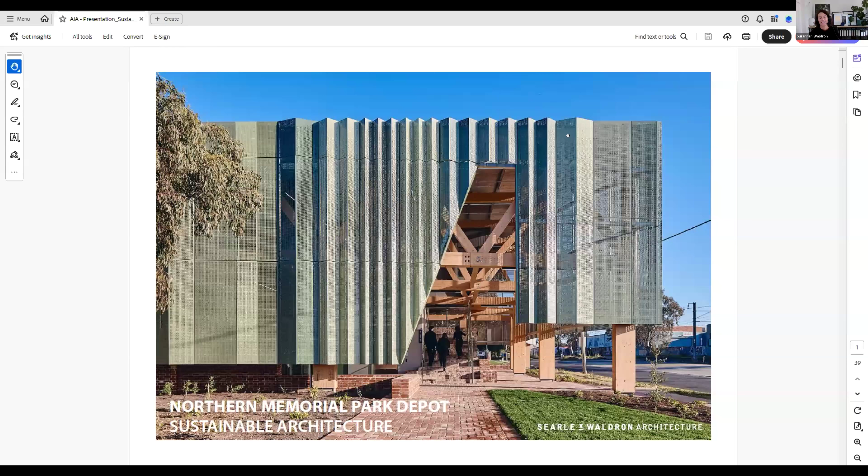Thanks, Steph. I'll just get my share sorted here. I hope everybody can see that one. And thanks for the kind words and introductions on this project.

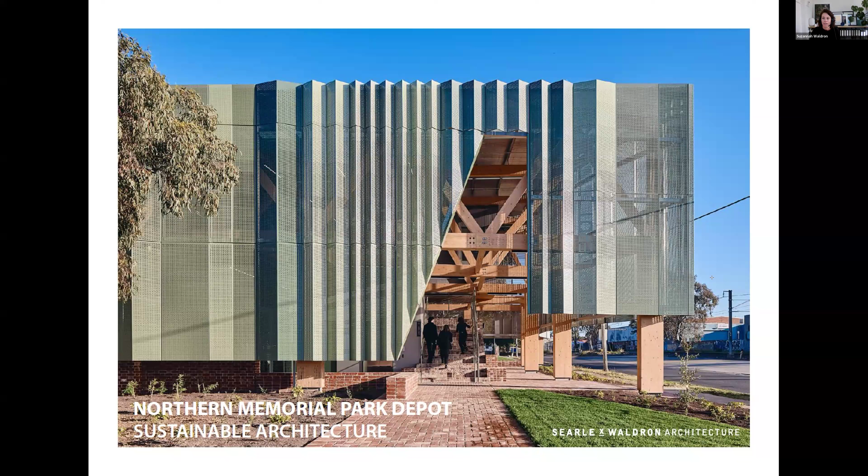Okay. I'm going to present the slides that we showed in the sustainability category at the Vic presentations for the Institute Awards this year, and I'll just do a few interjections as I go as well, just to explain some of our thinking around how we structured the presentation. Entering the sustainability category was actually quite interesting for our practice. Although we'd met the benchmark before, we hadn't entered a project specifically in this category. And it was a really nice opportunity to reflect on what we had achieved and try to quantify that in some way as well.

So Northern Memorial Park Depot is a significant project for Metropolitan Cemeteries Trust. It was built by Building Engineering. It's a contemporary facility which challenges the conventional typology of an operations depot by providing a beautiful workplace for people who work in emotionally challenging roles, dealing daily with grief and loss. Sustainability was a design priority for the project from the outset, and design infrastructure for longevity and sustainability.

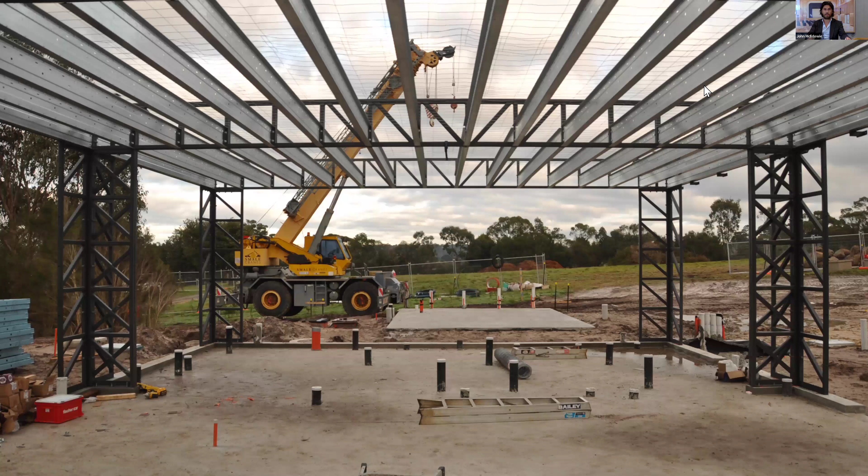So I want to start just by talking a little bit about the construction system, because that's kind of the heart of how this building is trying to innovate. It is, in the first instance, a prefabricated steel post and truss frame. Steel, interestingly, was chosen for its efficiency, but also because forest-grown timber can create monocultures and has potentially poor ecological outcomes. The concrete slab that sits below it is on a sort of plastic Cupolex waffle dome system, and importantly, that allows the separation at the end of its life, which isn't possible with styrofoam insulation that you traditionally have under a slab.

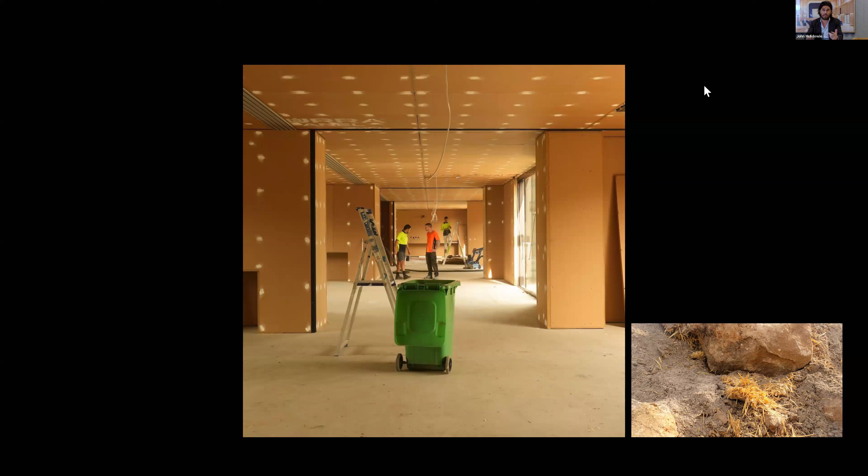The walls, ceiling, and the roof are all made from compressed straw panels, and they're embedded with biochar to clean the air the students breathe. And these panels sequester approximately 100,000 kilos of carbon dioxide. And they're also completely compostable, so any waste generated from on site is just returned back to the farm. The facade is made of recycled cork sprayed over an FC sheet substrate, which reuses waste from the wine industry.

And solar panels act as shading devices, as well as a pergola for outdoor learning, and provide 136% of the energy demand for the building, making it net zero in operation. It's also completely net zero in design, construction, and at end of life. I'll come back to that as part of our lessons learned. The battery storage system tied to the solar panels is Australian made and completely recyclable, with energy monitoring in each classroom, so the students can kind of gamify their use of the building and create opportunities for live behaviour adjustments to enhance the efficiency.

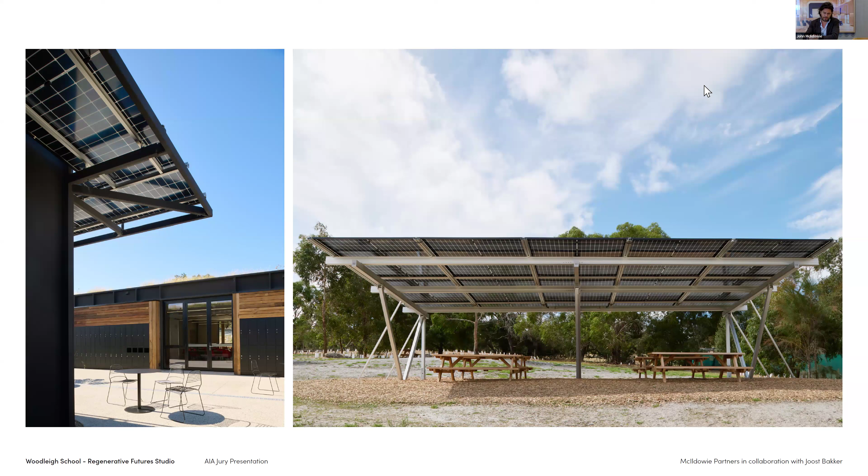The timber pergola that sits on the north side of the building to connect indoor and outdoor spaces is recycled from St Kilda Pier, and all other timber on the project is locally sourced from agroforestry. The living green roof creates a protected habitat zone that can't be accessed by invasive species like rabbits who have damaged the nearby nature reserve. It's designed in collaboration with landscape architect Sam Cox. It includes specific Indigenous flowering shrubs and grasses that act as a habitat for endangered native butterflies, bees and birds that cannot be grown on the ground. This means the building is a practical extension of the wildlife reserve and provides something that the wildlife reserve cannot.

And it also, I'll come back to this, but it provides really amazing learning opportunities for students to engage with the butterflies that are spawning on the roof, so that students are able to tap into and map the ecological benefits of the building. The roof holds 50 mm of water at all times and uses a drought-resilient wicking bed system to ensure the plants are well maintained, and they're still in good nick now after a summer or two. The green roof itself weighs down the building significantly and massively reduces the need for concrete footings. And it makes the green roof effectively cost neutral, which was a key driver in the decision making on the journey with the client. And based on some initial testing that Joost ran with the CSIRO, there's a view that the roof may be providing an insulative value of up to R17. So the reliance on air conditioning inside, and again being tested in practice, is extremely limited.

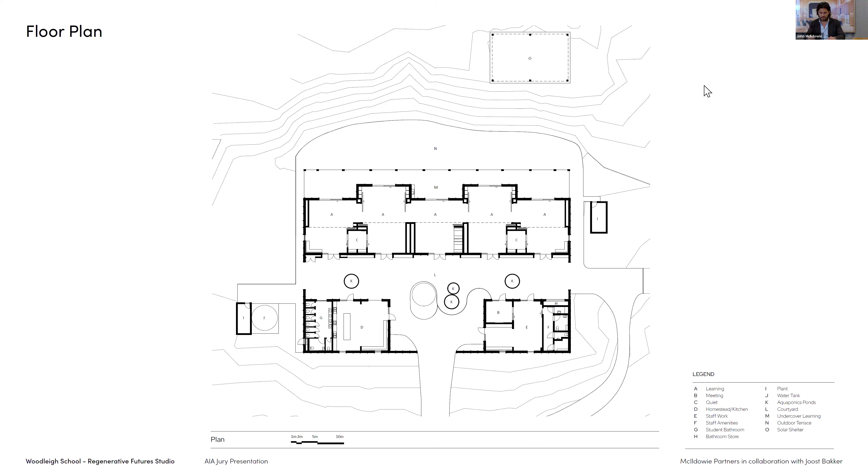This is a plan here. You can see the building is a collection of modular pavilions linked by courtyards and sheltered outdoor living spaces. The courtyard plan allows all the rooms to have a northern orientation, with solar panel eaves shading the north and west glazing, and all rooms also able to have cross ventilation.

Aquaponics tanks hold native fish, yabbies and freshwater mussels in the courtyards, filling those spaces with the sound of running water, providing learning opportunities on ecology and biology for students, as well as a food source, like literally catching a fish for lunch at school.

Each pavilion houses a separate function and aspect of the brief. The largest houses a collection of 5 learning spaces that you're seeing here. They're arranged linearly, with 2 quiet meeting pods adjoining them, and a series of flexible learning settings for personalisation and student agency.

The learning spaces are fitted with recycled fabric ceiling panels, as well as large sliding doors that link the spaces that allow traditional subject-based learning to occur side by side with the school's project-based learning program, which is a really critical flexibility piece that they needed.

In addition to that, a series of hemp sliding whiteboards, which you can see opening and closing here, slide the length of that linear space and allow the building to be reorganised as a linear gallery for exhibition of student work at the end of the year, as well as ongoing learning.

A second pavilion houses staff areas and amenities, while a third, seen here, acts as the homestead, a communal kitchen and social space shared between staff and students, building a sense of belonging and community.

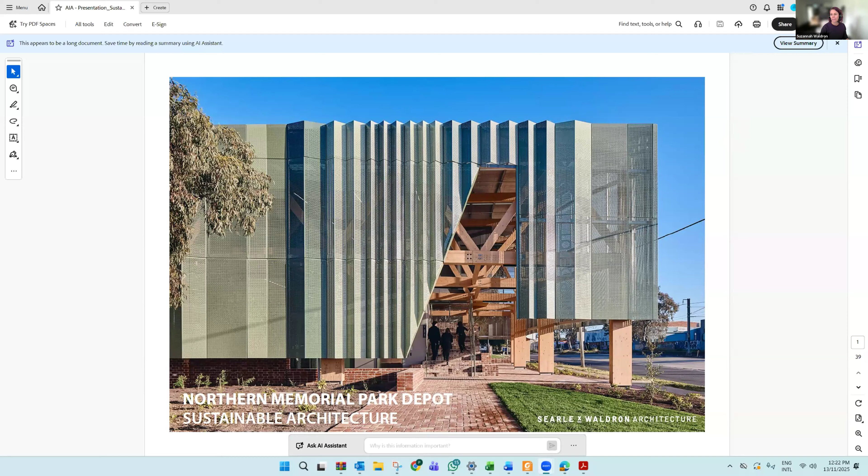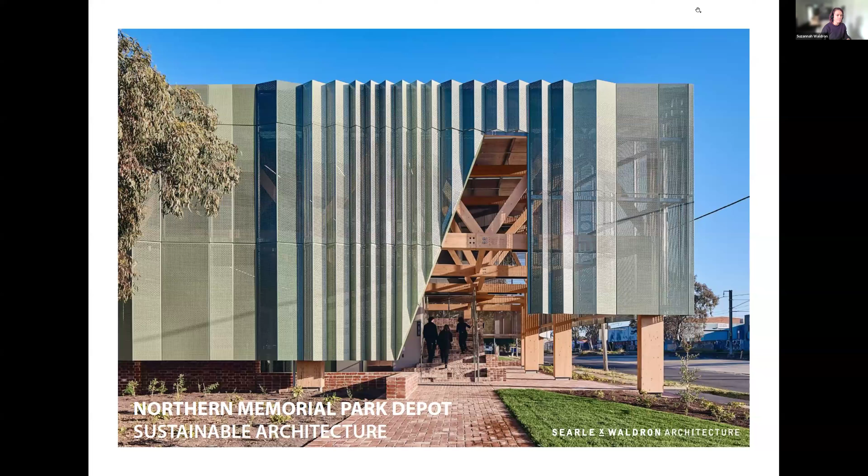If you could stop sharing your screen, John, that'd be great. I thought I already had. Okay. How are you going, Susanna? Is that sharing? I think you're on mute. That's come up. Perfect. Hi, apologies everyone. Are we sharing? Yep, all good. I'm so sorry. I'm going to suggest that we go to Jeff to give you a bit more time, Susanna. I think I'm good. So sorry. No, honestly, it happens all the time. Okay, I'll leave it with you, Susanna.

Thank you. Okay, everyone. In the sustainability presentation, things went a bit smoother than this. Hopefully there's some laughs in the silence of the Zoom webinar here. Anyway, I'll pick up where I was.

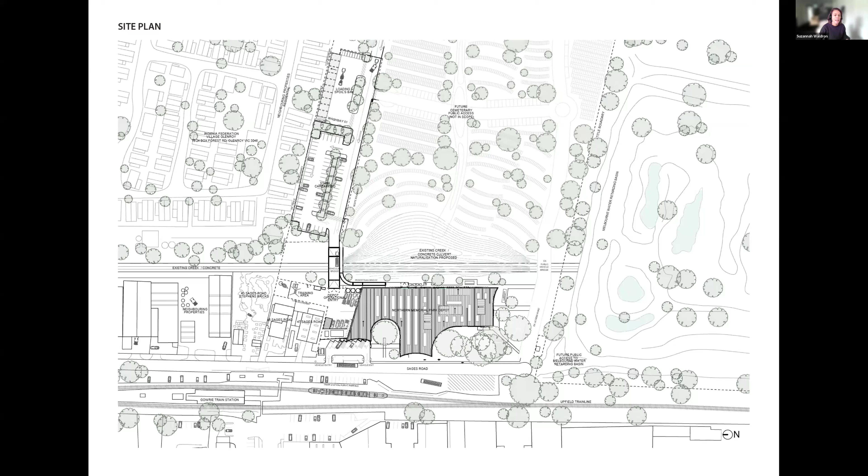I'm Susanna Waldron, presenting Northern Memorial Park Depot, a project that we did for GMCT, the Greater Metropolitan Cemeteries Trust. A really important part of this project was reflecting the values of the client. I was talking a little bit about some of the site analysis that we presented in the project. I think I had got to this point of talking about the site constraints. We had a very long western facade, which was unavoidable just due to the site layout.

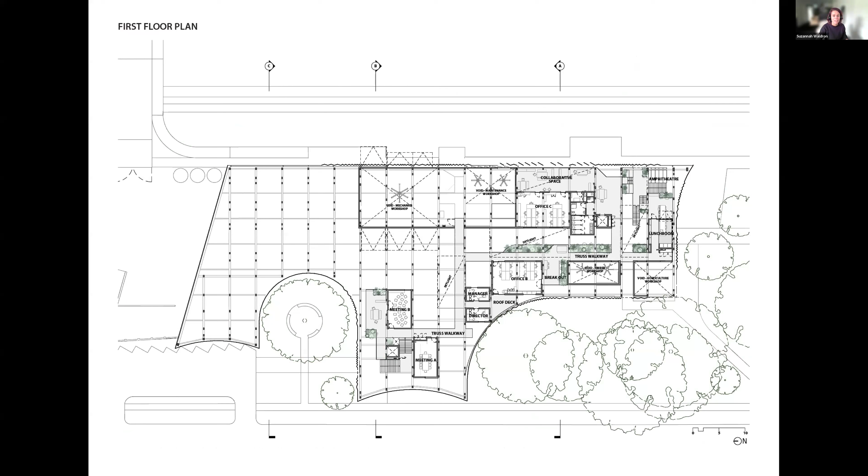And we took strategic decisions during the layout of the spaces to orient spaces that needed light towards the north and spaces towards the west that could be shielded from the sun along that long edge. This sustainability drawing was really a key thing that we worked on as part of the presentation for this award entry, pulling together all of the different strategies we had in the building.

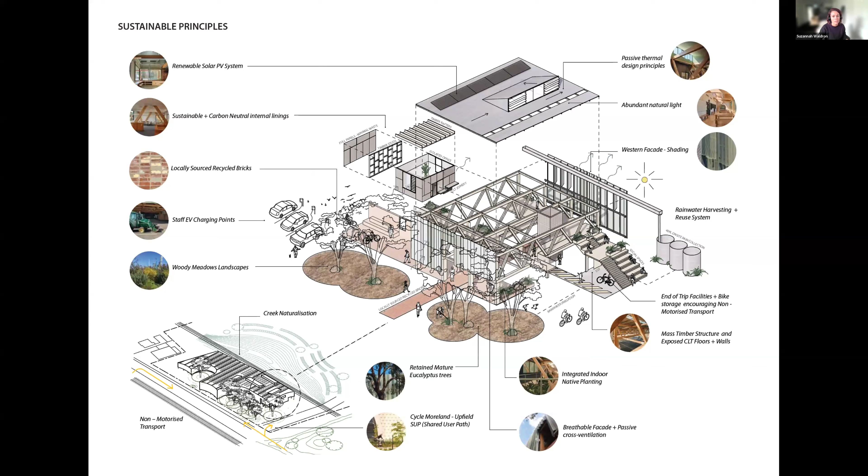This project was not a Green Star certified process. We went down that pathway originally, but we really took an approach with the client of trying to maximise doing as much in terms of sustainability as we could. And so this presentation strives to speak to some of those things.

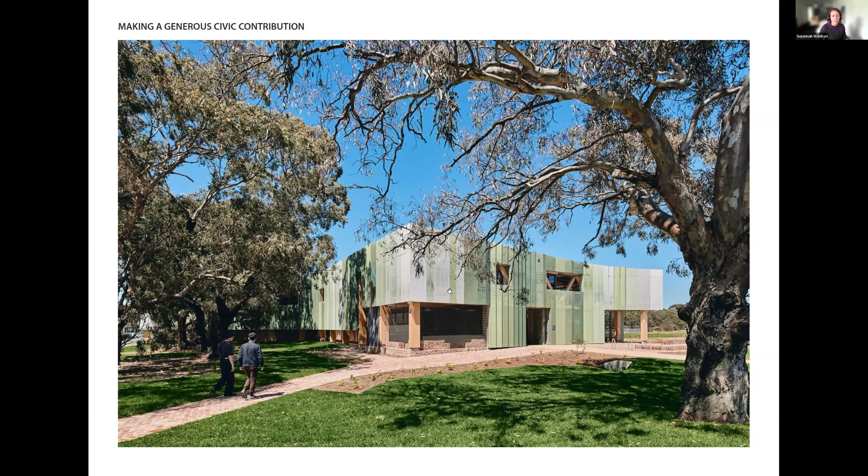Northern Memorial Park provides a mix of workshops, offices, storage and garage spaces for GMCT's staff operations. It's a 2-storey mass timber operations hub, and it rethinks a traditional depot typology. The industrial truss was a really big part of our rethinking of that.

So in terms of the way we conceived the project, we chose timber for its sustainability. It's a renewable resource with low embodied carbon. And also a really important thing was its natural warmth and connection to nature. So the ability to have a biophilic effect and enhance overall staff wellbeing.

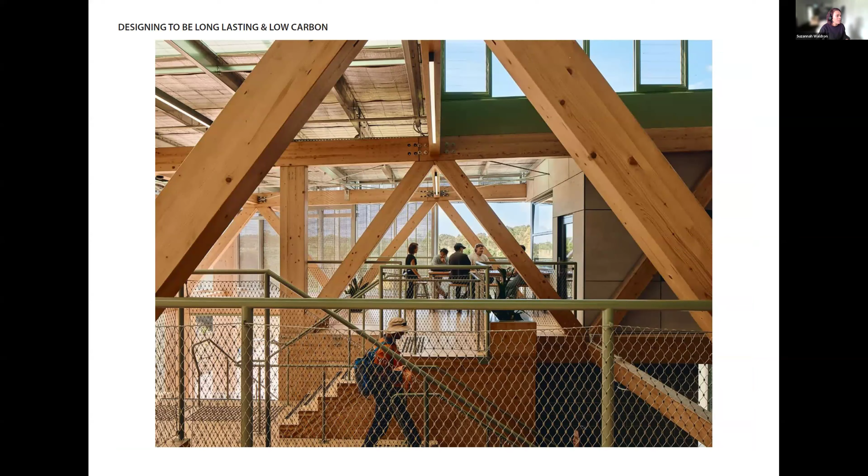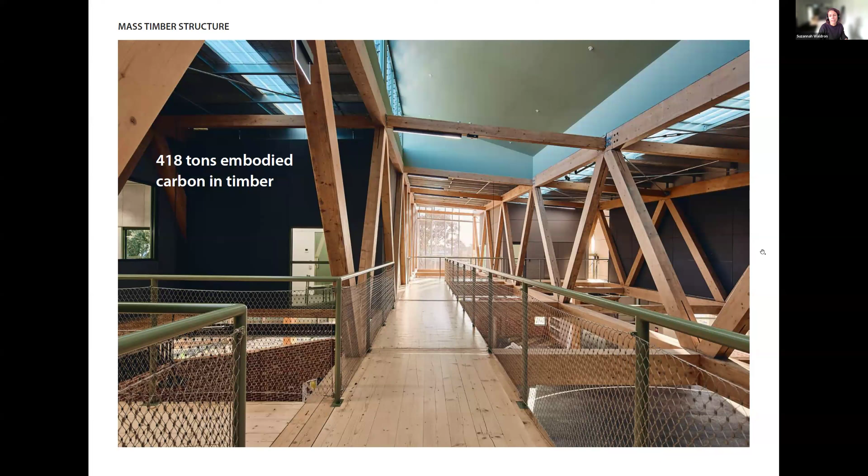The project makes significant use of spruce glulam and CLT, and this forms the primary timber structural trusses and flooring throughout the project. And as part of our submission in these Institute Awards, we actually followed up on confirming what the embodied carbon was, going back to Tekka, who are our timber supplier, and including some of those facts and figures in the presentation as well.

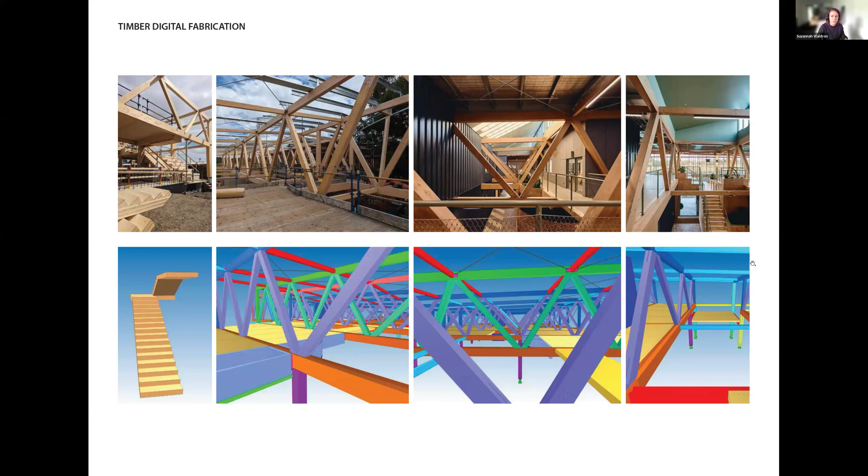Part of our process was working through highly detailed trusses. These were digitally fabricated by Ergodomus and Tekka for efficient on-site fabrication and minimal wastage, and we developed this LOD 400 model to assist with that. The process of resolving the timber structure in collaboration with building engineering and Tekka has resulted in a sustainable structure. It also has beautiful details. And so those two things were things we spoke about in the presentation.

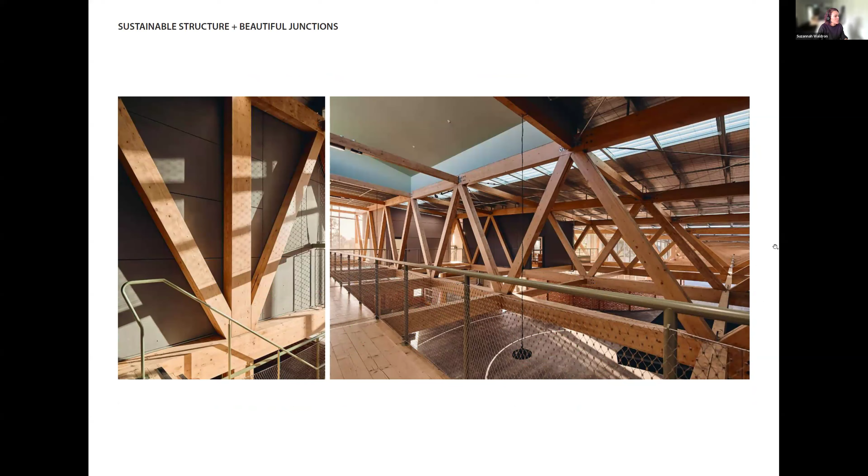I think in terms of construction and operational waste, we looked to minimise this through incorporating digital fabrication processes, which obviously minimise on-site cutting of sheet materials and linings. 95% of construction waste was recycled, and timber offcuts were almost entirely eliminated through the digital fabrication process, and some of the offcuts were used for joinery as well.

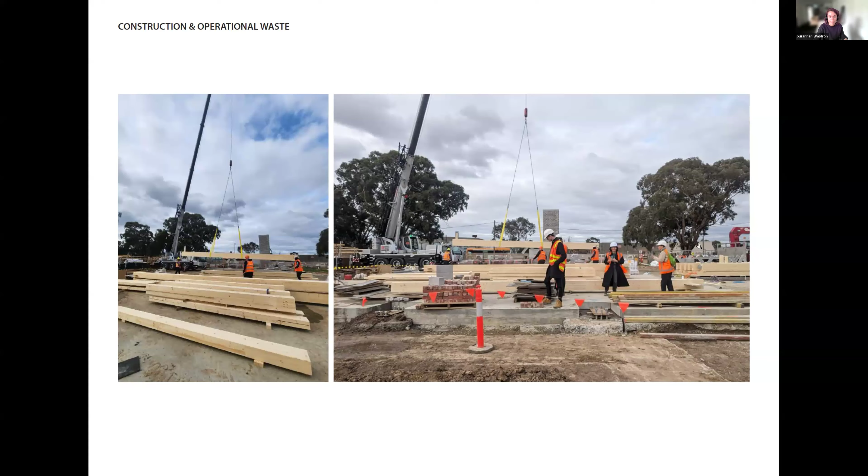Proximity to transport connections, including the Upfield train line and the Moonee Ponds and Upfield shared user bike paths, also made this an ideal site for the new cemetery staff operations building. And although some of that work was done by our client prior to us being engaged on the project, we tried to make sure that the way that we designed the project allowed for those easy connections for staff in terms of public transport and bike access.

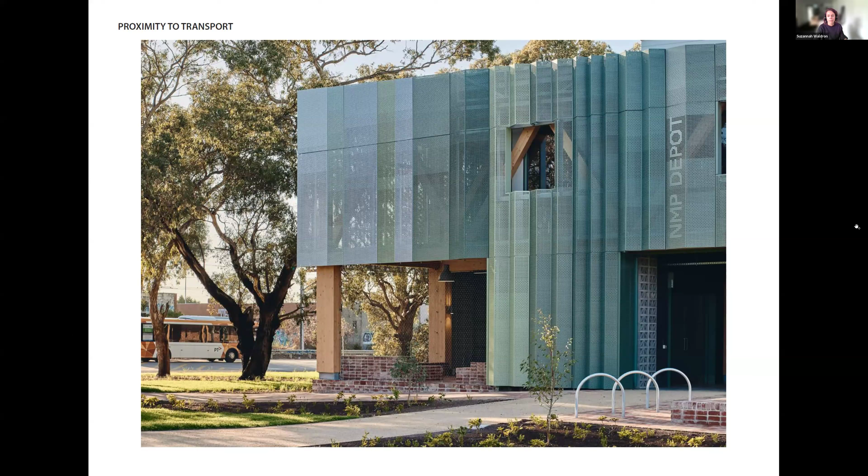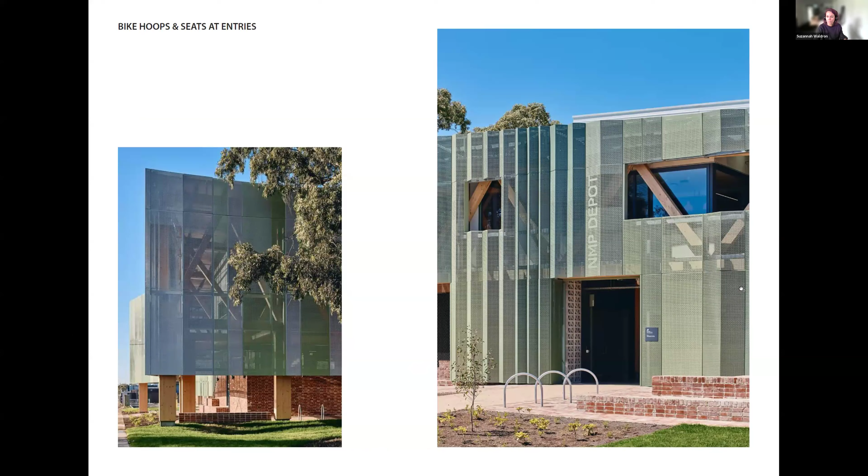The facade is modulated. Entry points were designed to prioritise those public transport connections, also providing adjacent seating where we had bike parking, encouraging cycling commutes with end of trip internal facilities as well. The facade modulates across its different orientations. So this is the east facade. We did a series of slides just on each facade here where we talked about the qualities of each.

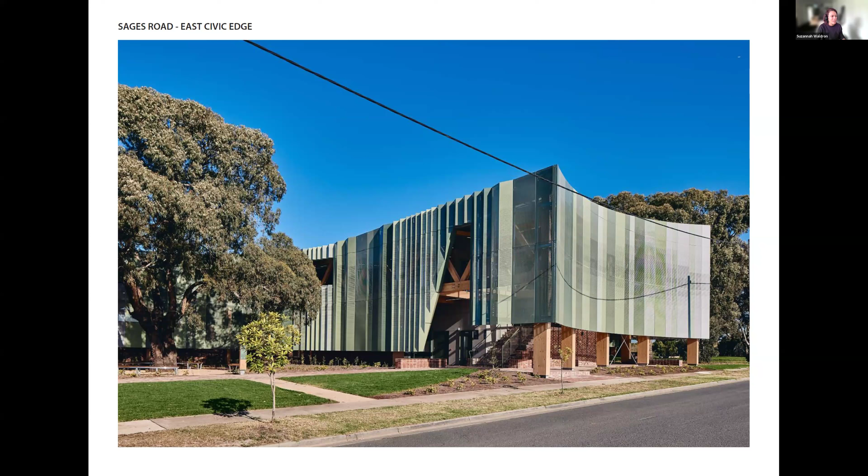So quite a simple structure, but on the east we have a public entry space opposite the train station. The screen is lifted at the base and creates a shaded colonnade. On the north facade, we take advantage of this orientation with punctured openings, collecting sun. They're intersected by timber trusses and offer light-filled framed views that connect this north facade to the social kitchen and horticulture spaces, and also to the views to the native wetlands beyond.

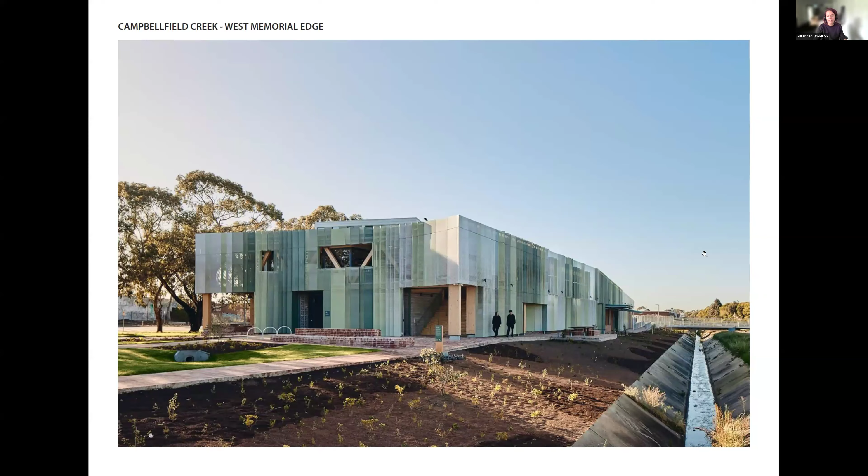The southern facade provides a vehicle entry point for the garage and shaded outdoor working zones for staff. And the west facade incorporates these angled perforated mesh facades and operable shaded awnings to provide solar protection along this long face. So these are the details of those louvred fins and indented entrances along the west, which provide shaded and also animated entry points, animated by the afternoon sun.

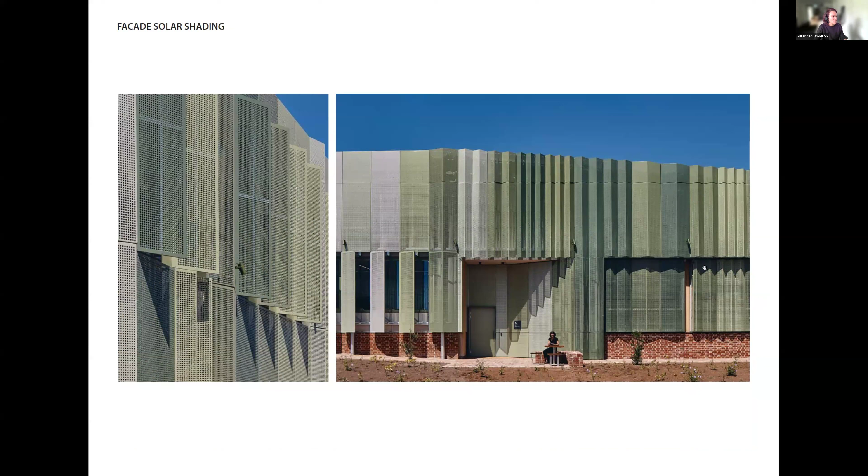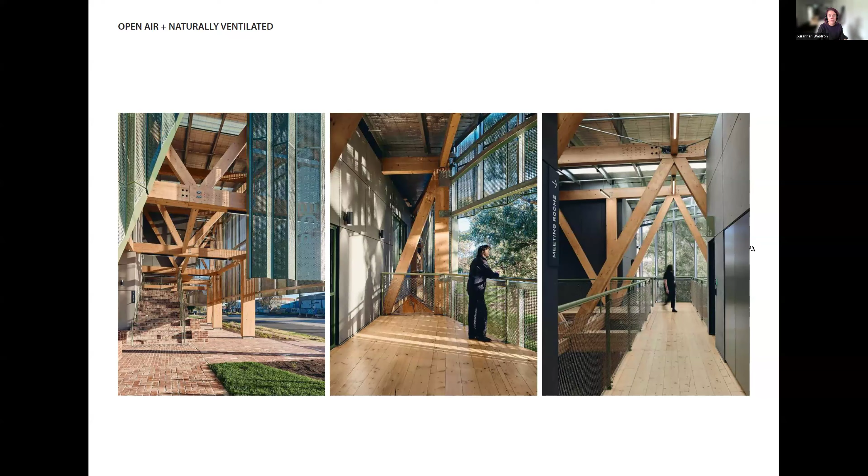Natural airflow and cross ventilation were prioritised. So just going through each of the key things. We tried to create high internal open air spaces that would sit between these enclosed pods, which housed office and meeting rooms. So really minimising the areas which required mechanical ventilation. Open and perforated mesh screens and web mesh netting were provided to openings in naturally ventilated areas, allowing for passive cooling and reducing material usage.

And a mix of enclosed, conditioned and open air spaces were provided for work and collaboration. So this is an image of some of our team sitting in one of those spaces. The intent here was just to minimise conditioned areas and create flexibility for the operations team.

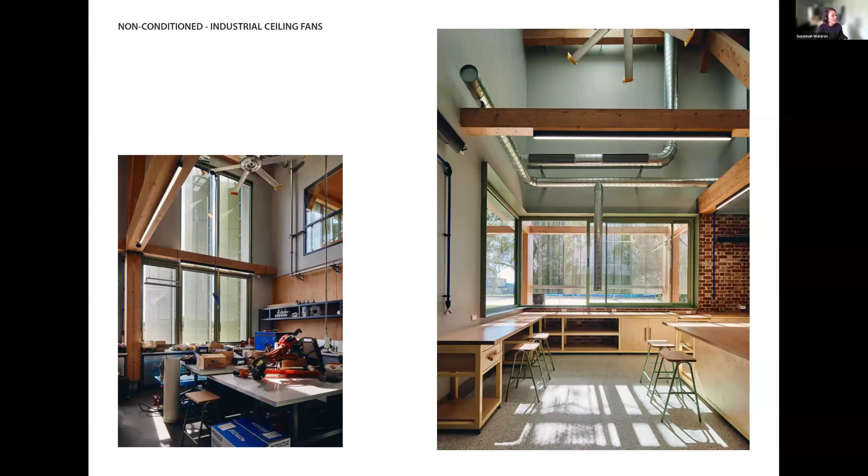And I think part of this was thinking about the workforce who we were designing the building for too. They're very much indoor, outdoor workers. And so this kind of connection to the elements was a key part of our briefing with them. We sort of looked at some of the internal spaces here as well. So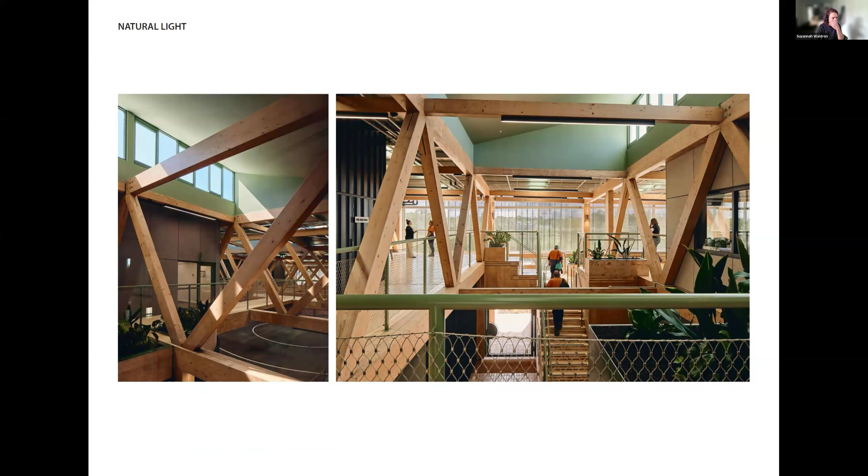we used ceiling fans in workshops. We had targeted HVAC design. This allowed for the co-location of offices and interior spaces and industrial and vehicle areas. Natural light was critical. We amplified this with interior skylights, which are oriented to the north and the east and bring light into this large internal span of the depot spaces. So there was a real risk that some of these spaces might feel quite industrial and dark, and the integration of natural light alleviated a lot of that.

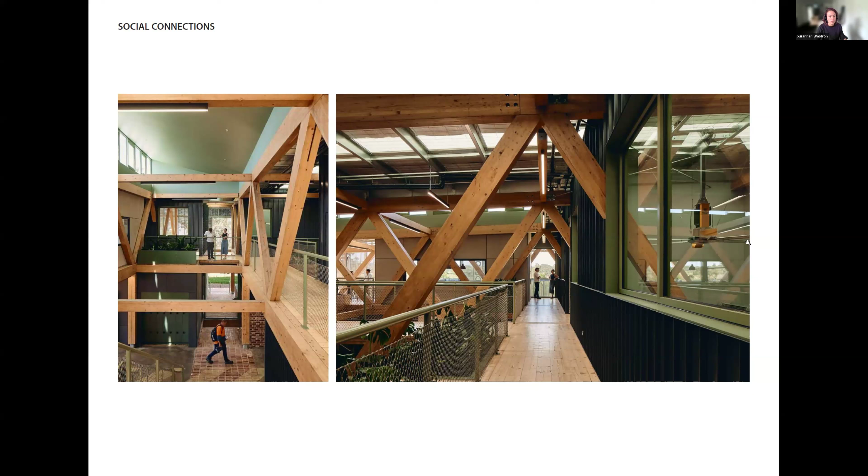Open walkways and voids, just focusing on how we created both spatial but also social connections within the depot. And I think this idea of sustainability also extending to the well-being of occupants was a key part of what we wanted to talk about with this building. In addition, sustainable and carbon neutral floorings and finishes and wall linings were sourced from sustainably harvested products. And the acoustics of a lot of these spaces were also improved through the use of timber, working well in the confines of a large and sometimes loud depot environment.

Planting was quite critical. So Australian native plants were incorporated into internal planters. These are maintained by the horticulture team who work on site. And there was both a visual amenity to including planters, but also improving air quality and the associated benefits on concentration and staff engagement that come through that.

A key part of the social connections in the buildings was a social staircase, which connects levels. This amphitheatre stair also encourages staff to use the stairway rather than the lifts as their primary circulation route, and connects social spaces, amenity, collaboration spaces, and lunchrooms.

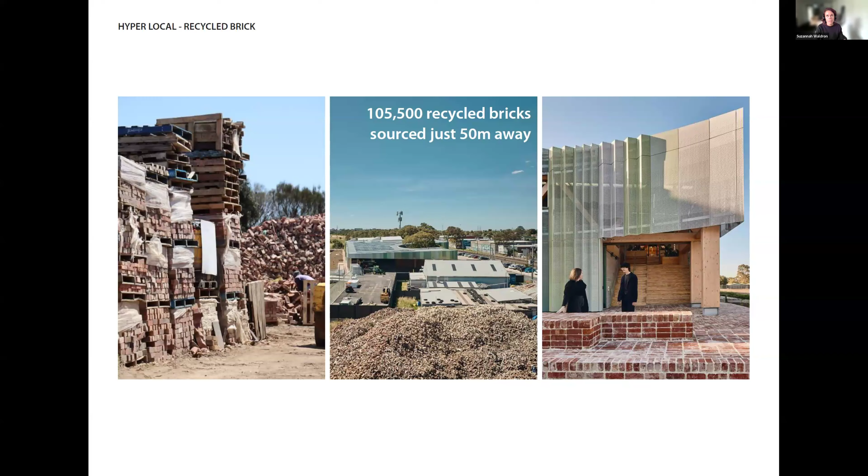One really interesting part of the project was the use of a very, very local brick recycler. So the image in the middle here, you can see the brick recycler, which is actually located 2 doors down. And so we sourced over 105,000 recycled bricks from just 50 metres away from the site. They were used for the perimeter walls and paving and external ground floor walls and some of the seating and joinery elements on the exterior as well. It was a very opportunistic thing that developed at the beginning of the design of the project through a site walk.

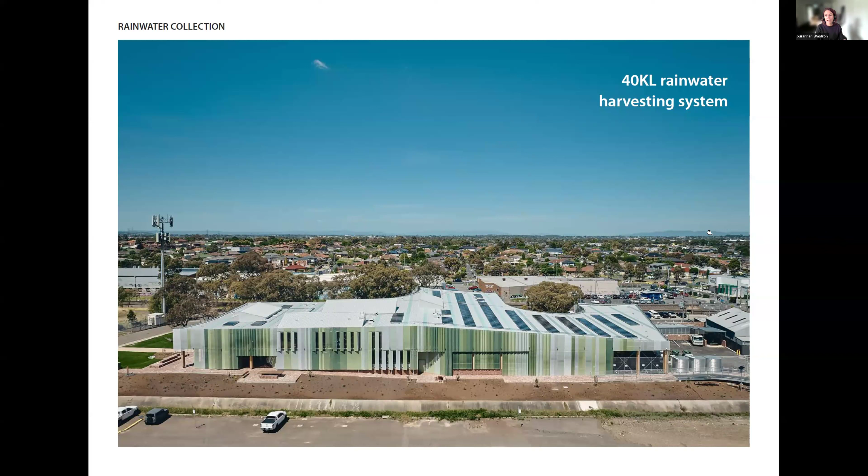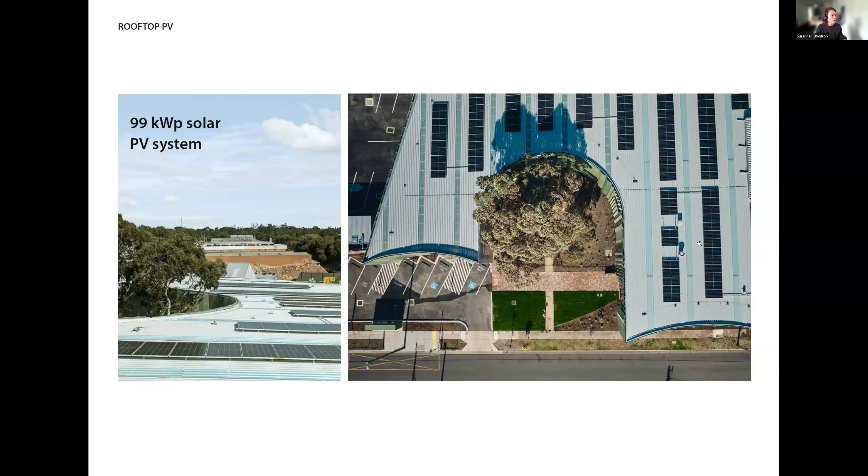Rainwater collection is also critical and forms part of a site-wide water reclamation and filtration strategy, and included a 40 kilolitre on-site tank, rain gardens, and the reuse of collected water for irrigation. Again, solar PV, I'm just pointing out each of these things, but there's a 99 kilowatt solar PV system on the roof, which has also been designed for future expansion if necessary, and is anticipated to offset the annual energy consumption of the building. So there's a target to achieve net zero in terms of operational energy consumption.

We worked with Oculus and Claire Martin in particular to really think about landscape on this project. So designing around the existing trees, these very beautiful mature gums, was a key part of it. And we sought from really early on to identify ways to mitigate any threats that would reduce the extent of Indigenous trees and habitat. The civic facing facade to the east wraps behind those existing trees, framing this mature canopy. This creates spaces for staff to sit and connect with landscape. And then new planting has been introduced. It's actually really established now, but in these photos was obviously recently planted. And this was part of an emerging woody meadows landscape.

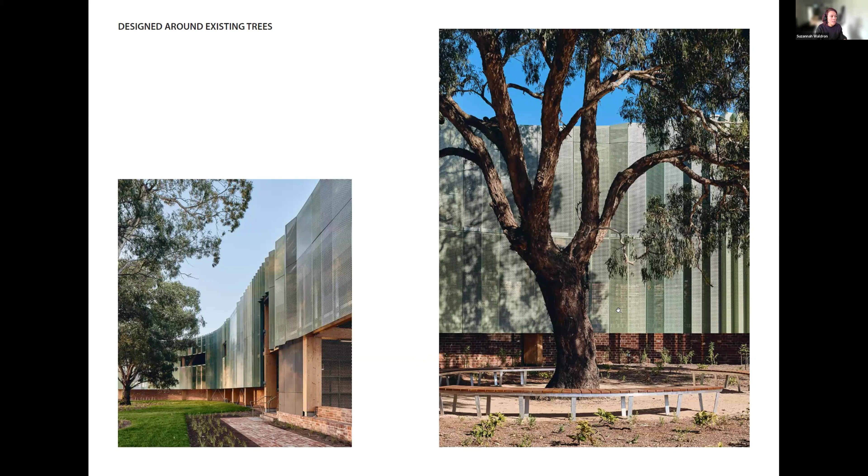So this landscape strategy was developed in collaboration with Oculus, the University of Melbourne, and the client's horticulture team. Claire and her team at Oculus did a lot of research with Dr. Claire Farrell from the University of Melbourne. It's a woody meadow trial plot, and this is an innovative low maintenance resilient planting approach. We saw a post that the landscape team had done when they were planting on site saying there were over 18,000 plants. So we also took the opportunity with entering the Sustainability Awards to come up with some of these facts and figures to measure, if you like, quantify the sustainability of the project.

We also talked about one of the future things which has not been realised in this stage of works, but hopefully will be in future, which is future creek naturalisation. The project's located right next to a Melbourne Water retarding basin and Campbellfield Creek, which is a concrete culvert adjacent to the site. This had impacts in terms of us needing to address 1 in 100-year flood levels and deal

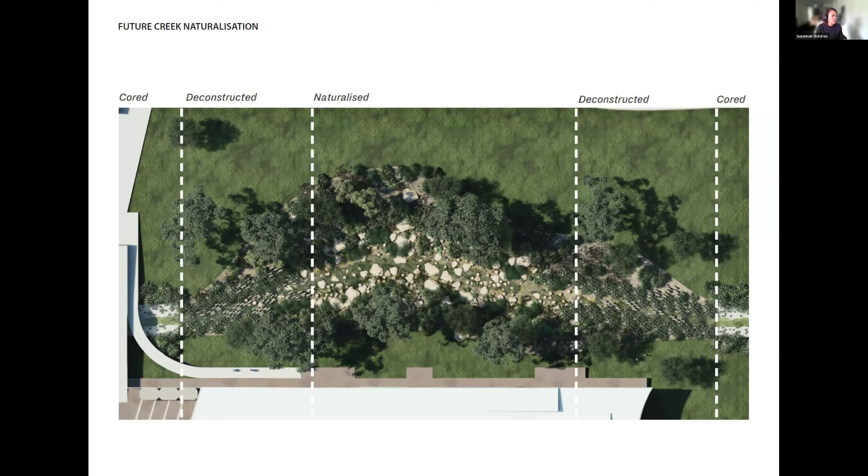with building levels, but also a very beautiful strategy was developed by Oculus in terms of the potential to naturalise that creek, which would add to ground permeability, slow water flow and improve flood mitigation. And there was an approach we took as a design team into how we could deconstruct and partially reuse the demolished culvert. And so we're hoping this will form part of future memorial spaces adjacent to the site.

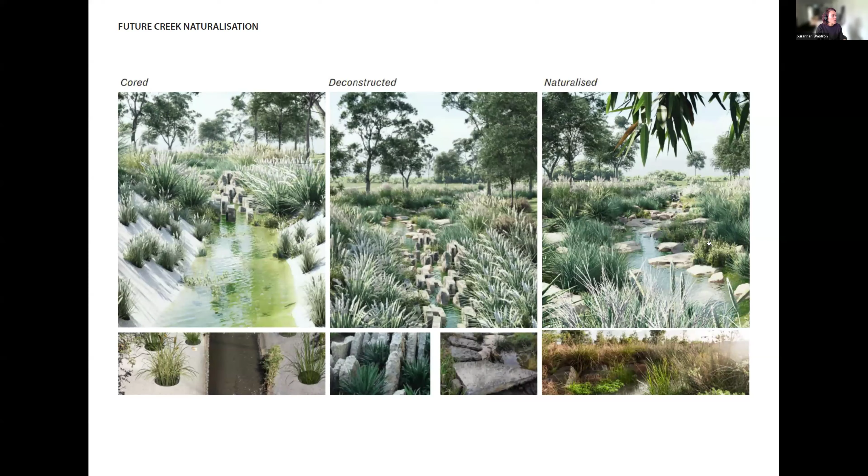So this is sort of wrapping up our presentation. I think what we were really interested in was making the often overlooked aspects of cemetery operations visible, engaging and beautiful. We hope that this project sets a new standard for operational facilities and memorial infrastructure. And we know it's playing a crucial role in shaping the future of our clients' services and reflecting their shared values for longevity and sustainability.

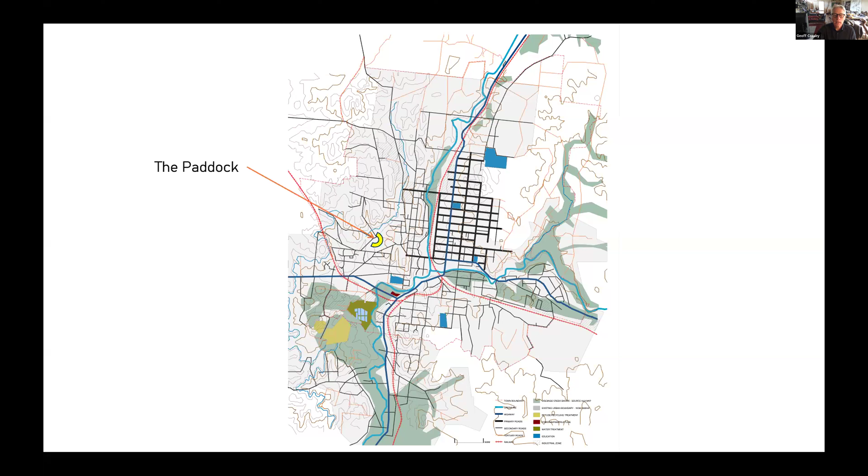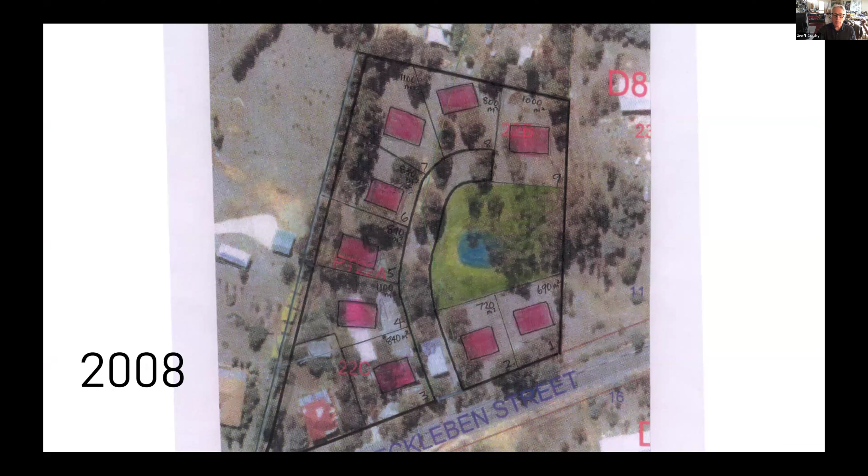It's just on the edge of the main part of Castlemaine, which is the intersection of 3 creeks, and you can see the paddock there. It's the edge of the town zone and looking out into the rural zone. This was the project in 2008. The clients came to us and said they wanted to do a development of a site they'd owned for 20-odd years that had a dam on it, and they thought they might do some housing. And we said there was probably a lot more density that could be introduced to stop the spread of the town beyond the main town zone. This is where we got to.

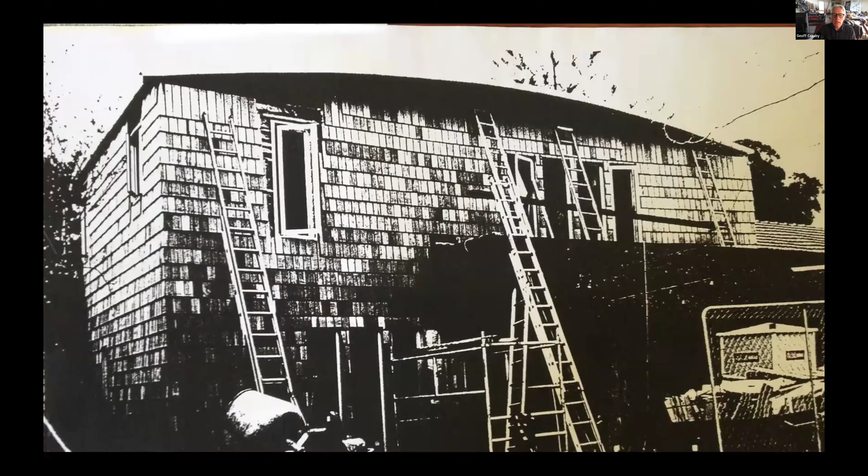I just went through in the presentation a few historic images that showed where we'd been coming from. This is a building we did in '93 using recycled materials, recycled shingle in this case for external cladding. That was a build shot of it. I'll just rush through these. I talked further about them in the jury presentation, but I didn't get through enough slides, so I'll keep going. This is a block of flats in St Kilda where we introduced a wind turbine on the roof and solar panels. This was back in 2005 and 6, and it was pretty

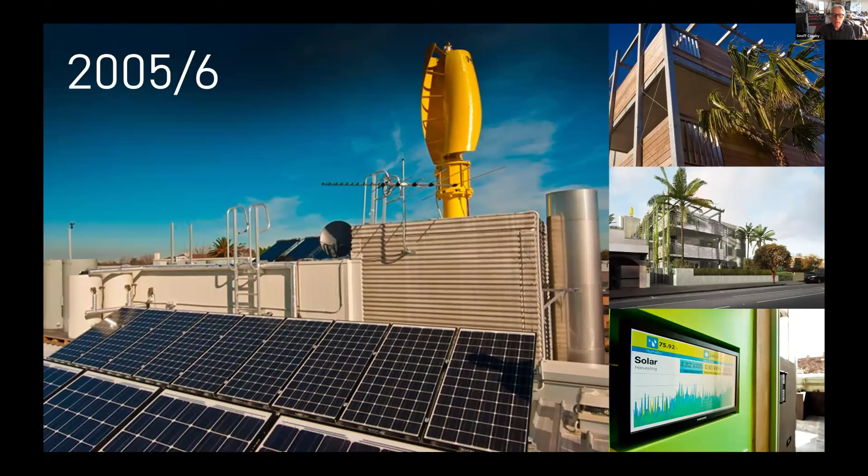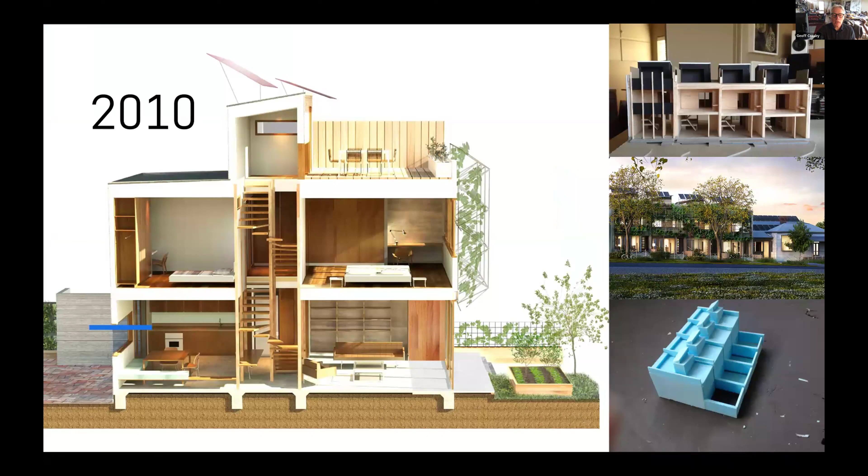One of the main targets of the project was to reintroduce ecological diversity into the site with housing, so they cohabitated. And part of that was doing a community science project to work out what was on the site at the time before the project started.

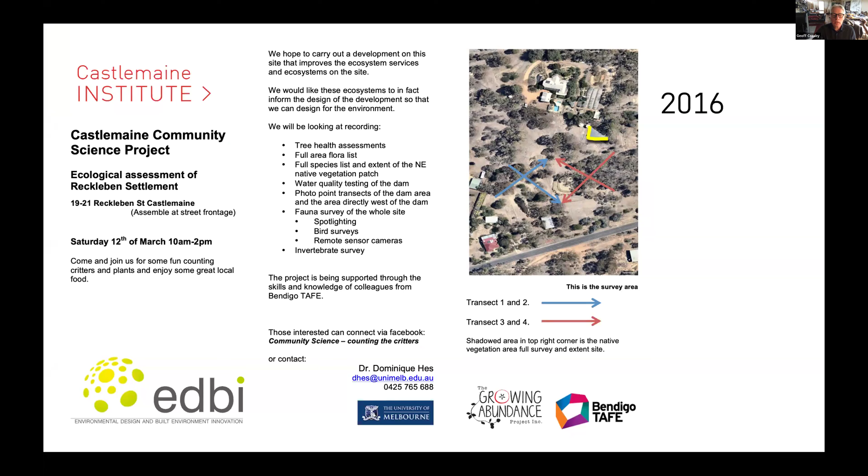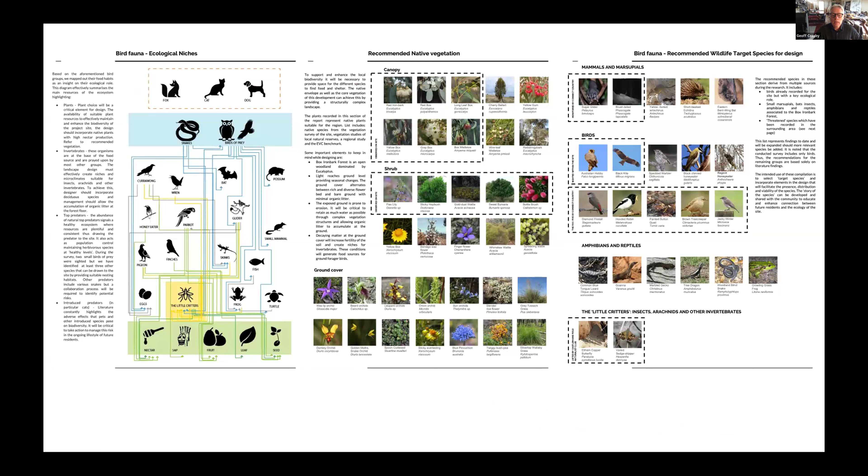We did this in 3 workshops, 1 winter, 1 summer and 1 spring. We advertised for the local community to come and learn how to determine what was on the site. Then we mapped what was there and what should have been there, and targeted in the project species that should be there but weren't there.

I'll skip over this.

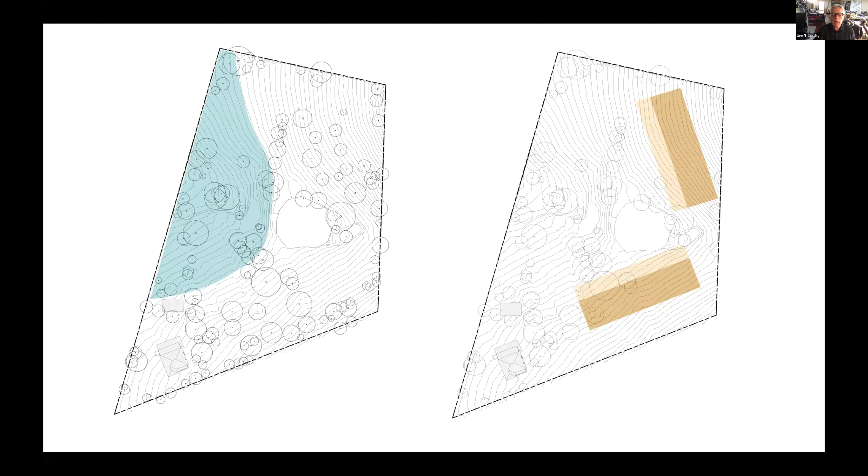We did extensive studies and plans into how water flow might work. This is one of the early schemes where we took the Bull Street project and just looked at the density. You can see at this stage the house on the right is still there. We were going to use that as a community centre.

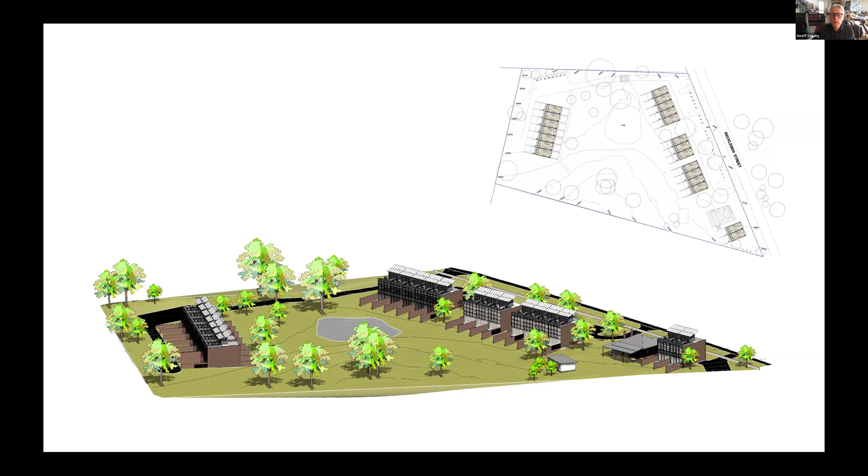Then we did a study on density in town. On that map on the left, you can see the green triangle is where the site is. And we looked at densities around 5 or 6 blocks around town to ascertain what density we were trying to better. Sorry.

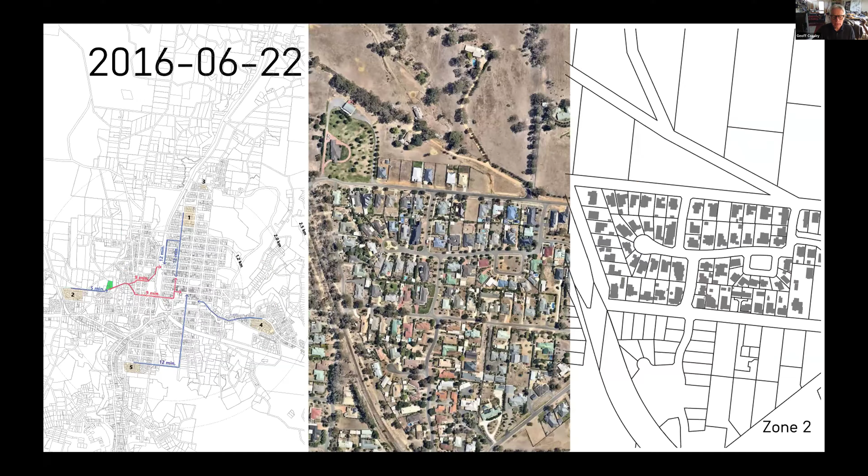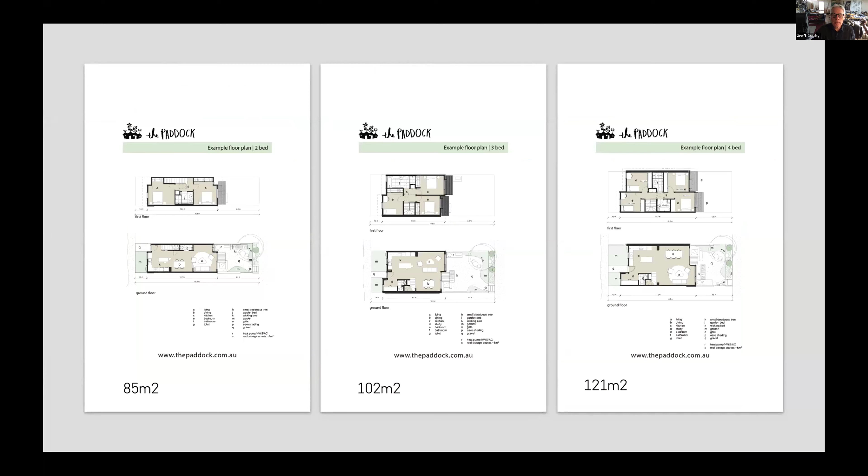We also looked at size of housing. Australia has the largest square metre rate of housing per person in the world, and we wanted to ameliorate that. So our units, 2-bedroom, 3-bedroom and 4-bedroom, you can see the size of them at the bottom is quite a bit smaller than the average. This is an internal shot of one of the units.

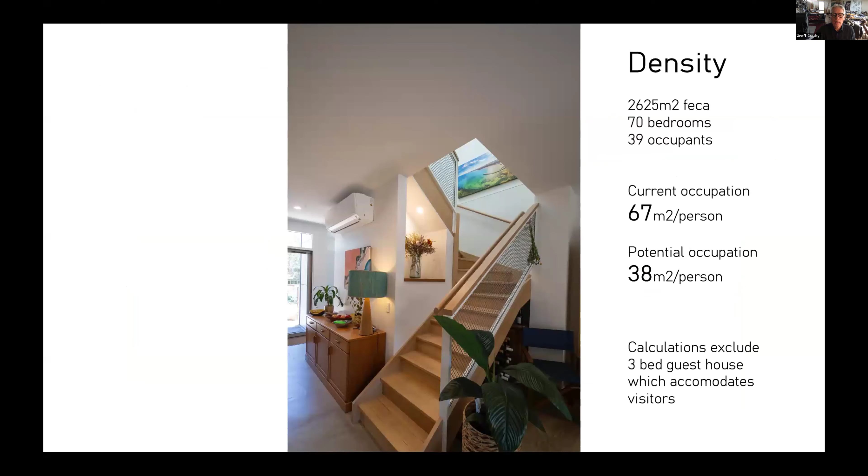When fully occupied, it would match a 38 square metre per person density, which, as you look back on this, takes it down to UK, Japan, France. These are some of the early sketches just trying to work out the systems approach.

I think for this presentation, I didn't have the capacity to do any work in putting it together, really. So this is everything that we've showed purchasers and clients and consultants along the way. So it's part of the process.

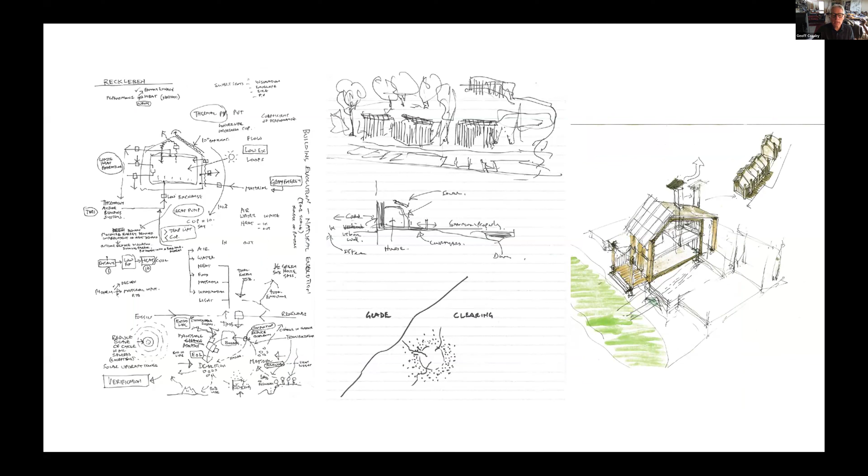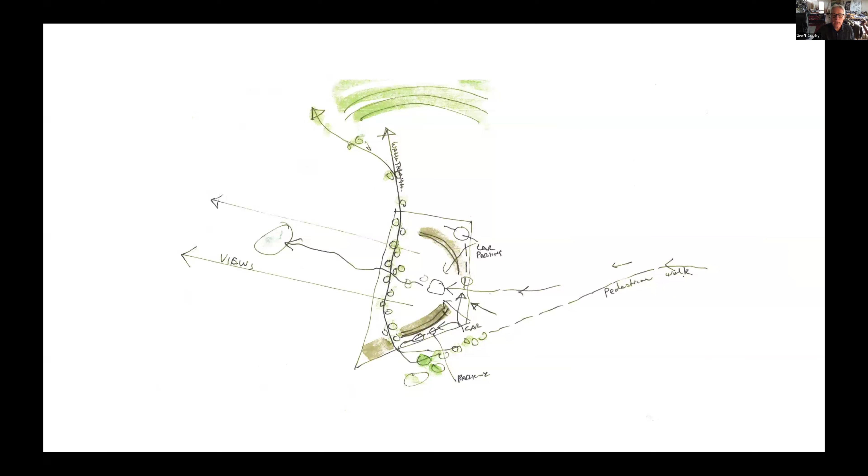This is a study of how water flows through the site. This is really early on. And pedestrian, we wanted to be able to access through the site to the bush behind it. Just a lot of sketches that tried to explain simple processes to purchasers and clients.

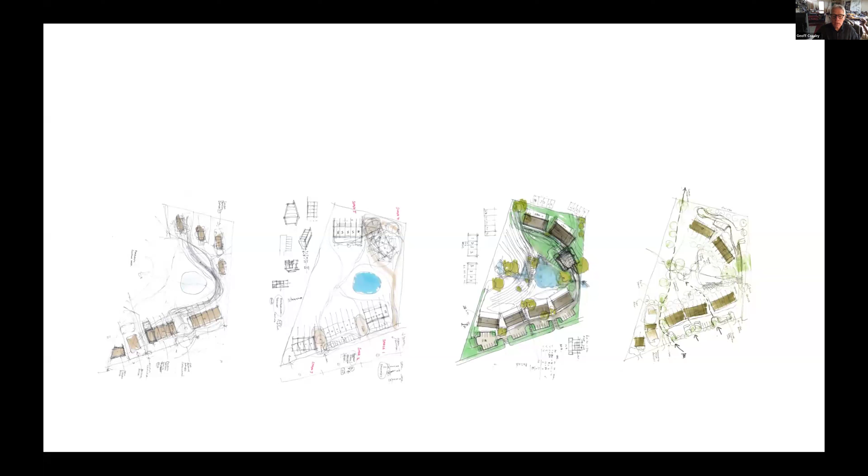If you look through that creek, the water flow runs down through the middle of the site, and that's been maintained. This is the water flow area. Here's various ways that we looked at the density and trying to work with those heights and water flow. And also being able to bring people into the site was really important, not just occupants, but passers-by and people accessing the land to the top, to the north.

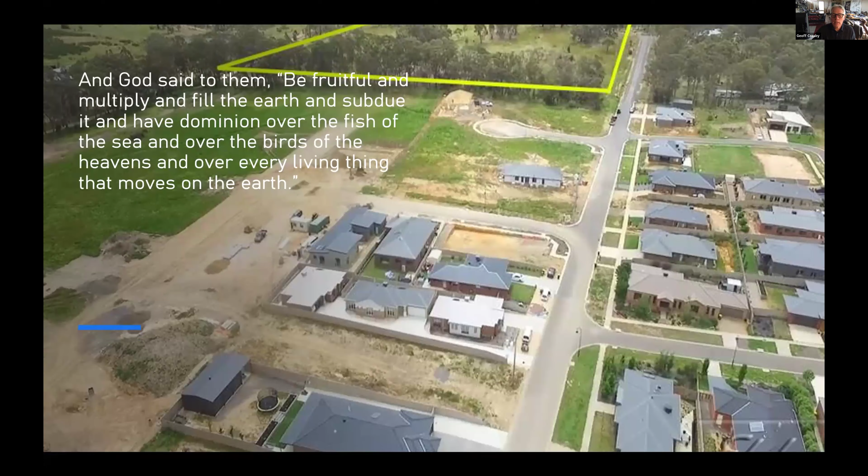We did probably 8 or 9 workshops with various people like potential purchasers, clients, consultants, and covered different areas. One was the biophilic design workshop. This was with the consultants, but we did another one with purchasers. This is what happens normally in Castlemaine. I took people through a history of biophilia and where it came from and how our assumptions need to change in the relationship between nature and building.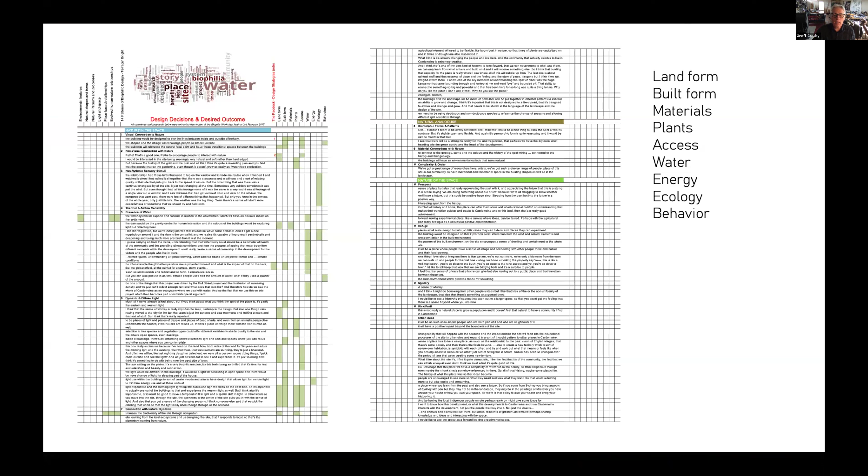Through the biophilic workshops, we did an assessment. People responded, we recorded conversations and looked at what was important to people and set up a chart on the right-hand side of those conversation bits. We identified what people were really talking about so we could bring that into the brief. We did a workshop on LBC expectations with consultants, and this is some of the work with the LBC.

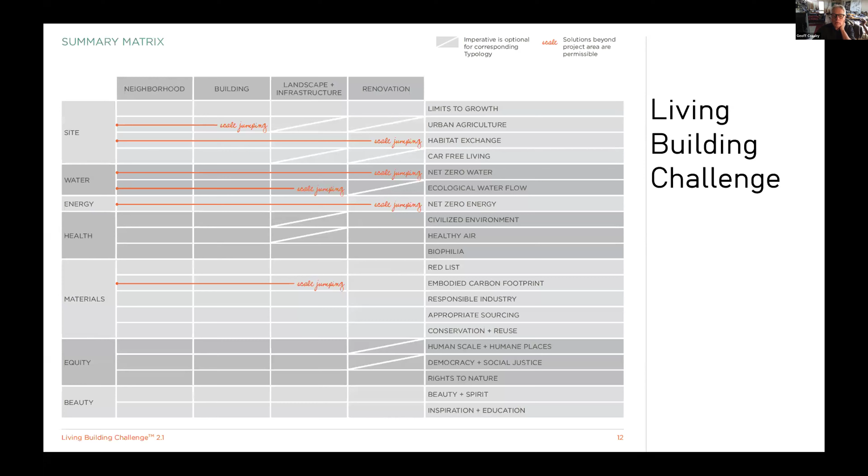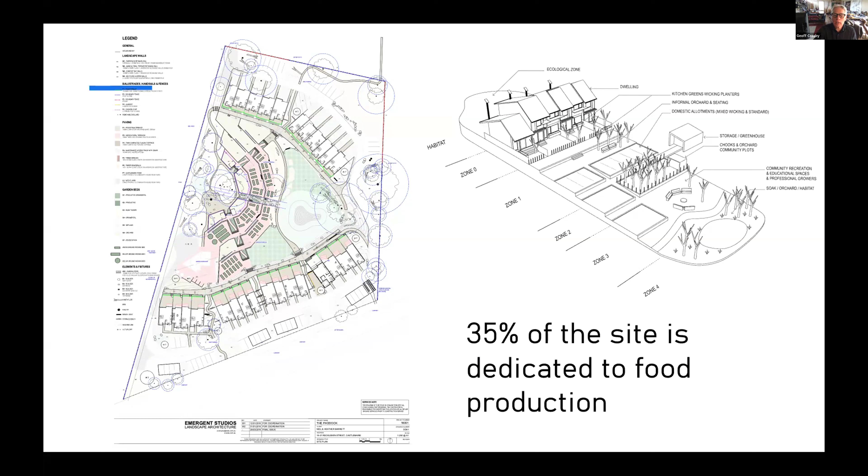35% of the site is dedicated to food production, and you can see now the form of the water course, the dam, the watering, those are wicking beds in the middle there, and then the housing wrapping around that, and cars kept to the edge of the property, and zones going in from the housing through different levels of privacy and communal space. This is what it ended up like.

Those units, the blocks, we had 6 different blocks. The first 4 were 4 units each. And part of the reason for that is that it was built in stages. First stage was 8 houses in 2 blocks. And we used a 6.5 metre and a 4.5 metre width for the actual units, which allowed us to drop in and out, change the building forms or the building layouts based on the occupants' requirements, so that we could maintain a sort of purchasing process and adapt to the market.

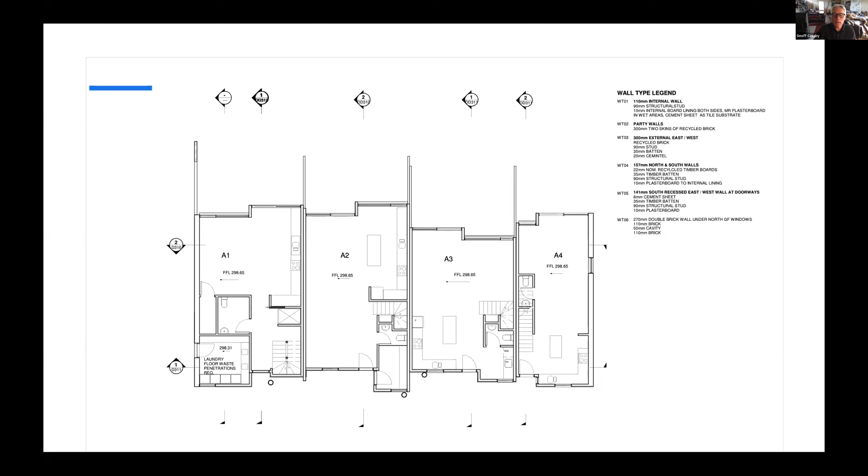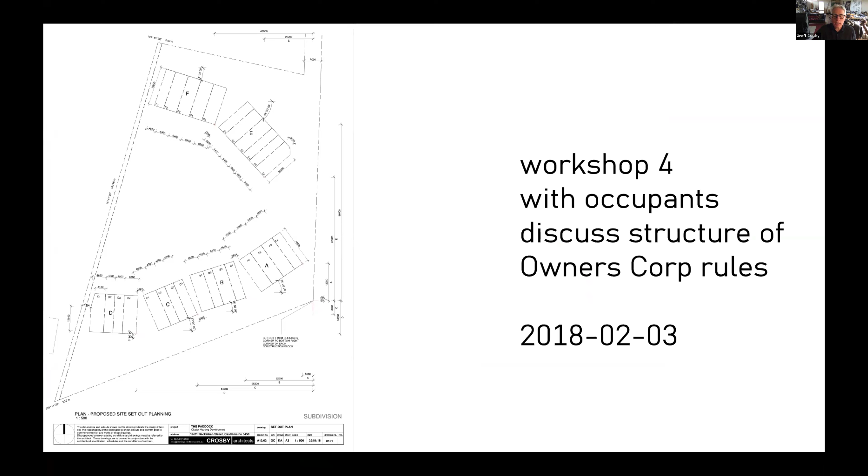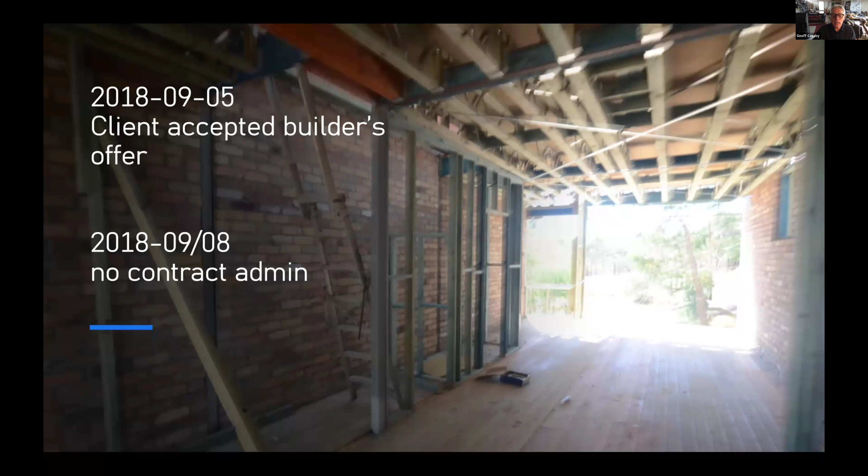We had workshops, as I say there, on discussions about how to structure the owners' corp with the potential purchasers. Client accepted a builder's offer in 2018 for the first stage. They tried to save some money by cutting our contract admin process out, which they realised was a mistake in the first stage, so we got re-engaged for that part. This was the house that was demolished, and we were going to use the bricks. The bricks are used for paving and communal walls.

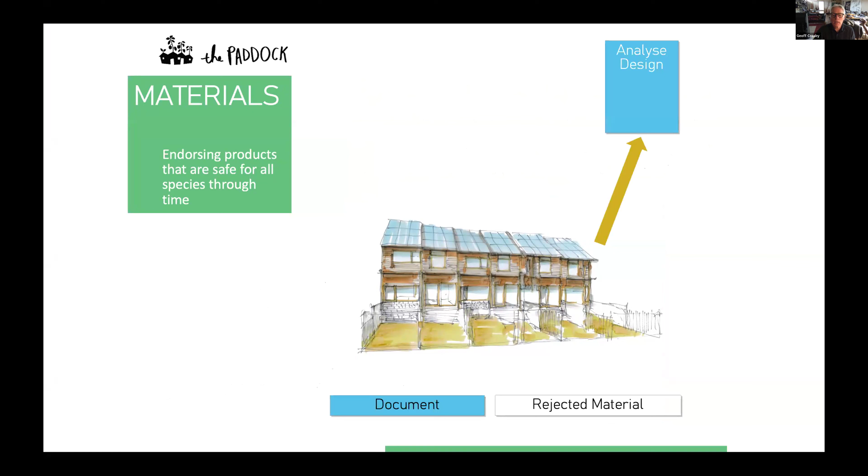It's just some of the development. This is one of the workshops we did with materials. So I'll just flick through this quickly. There's a lot of slides here. We just talked about this. This was with consultants, with the owners, and with purchasers, so that they understood the process that was taken. So a lot of the work was to communicate what we were doing and feed that back to people so they understood it.

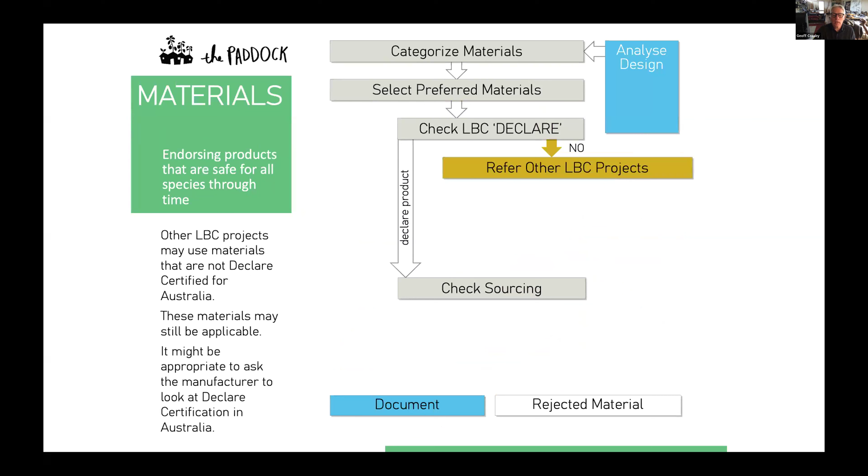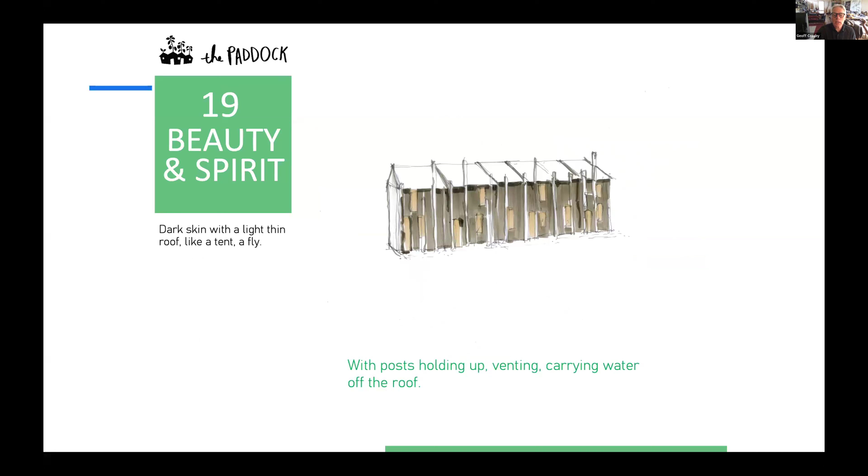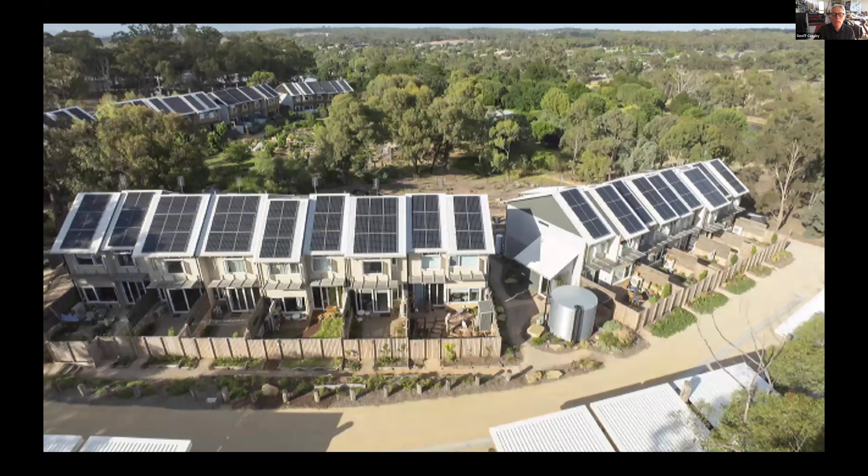So all the way through, the communication was the key to the longevity of commitment that everyone had to the project. That's it.